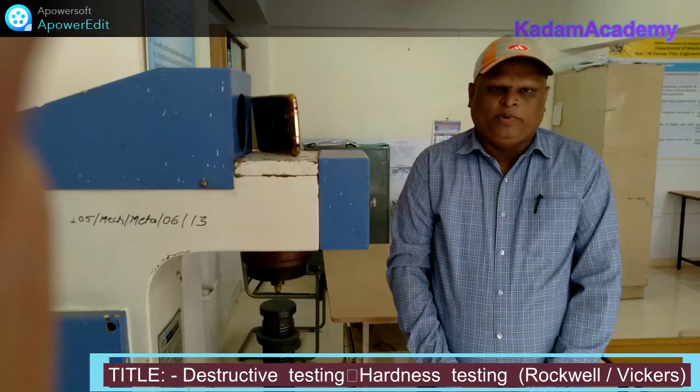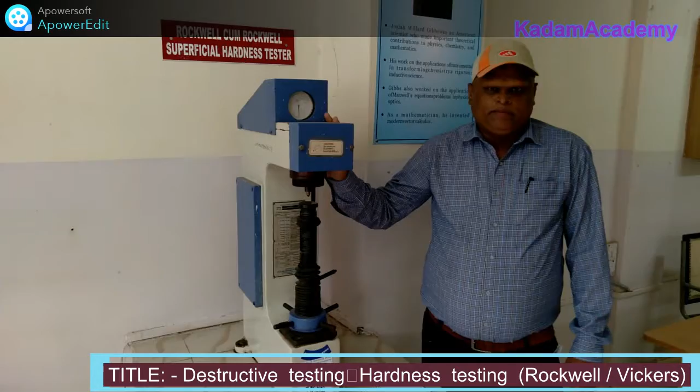Today's practical is Rockwell hardness testing. The aim of this test is to check the Rockwell hardness number of the specimens. We have taken three specimens here: an aluminum specimen, a brass specimen, and a mild steel specimen.

Let us see the principle and working of this Rockwell hardness testing. As we know from studying the Brinell hardness test and Vickers hardness test, the Brinell and Vickers tests work on the principle of area of indentation, but this Rockwell hardness test works on the principle of depth of indentation.

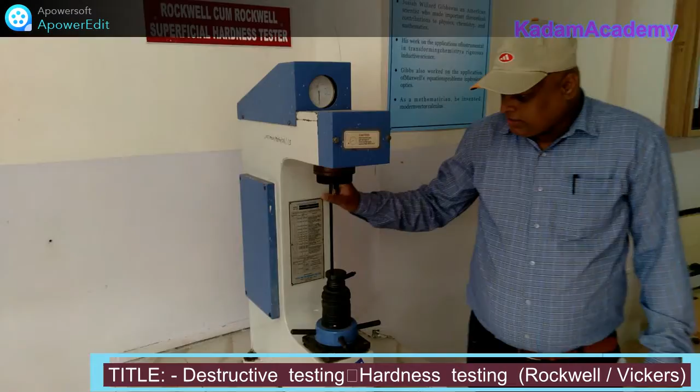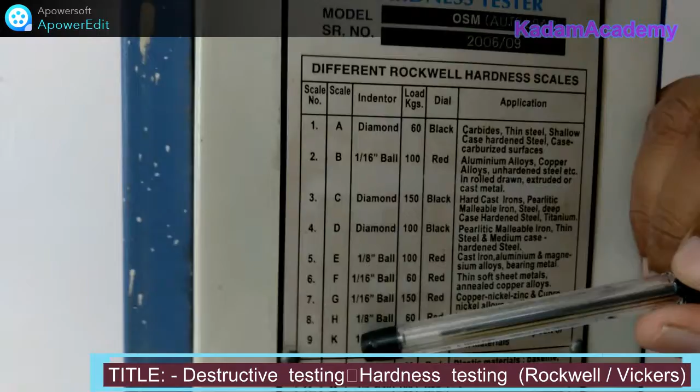Now let us see the working of this Rockwell hardness testing machine. This machine has a chart here. You can observe the chart: this is the scale number, then the scale column A, B, C, D, E, F, G, H, K, then which indenter to be used, then the load to be applied, which dial you are going to see, and the applications.

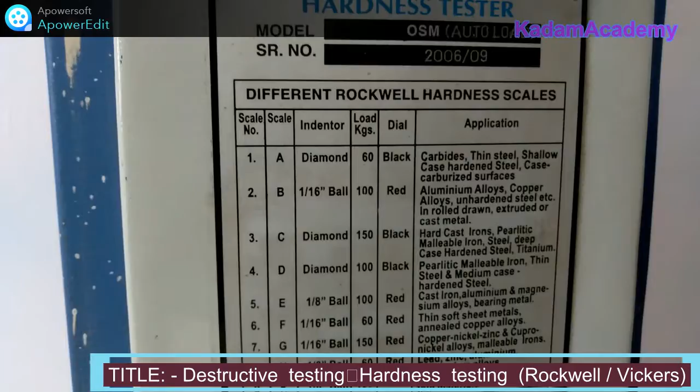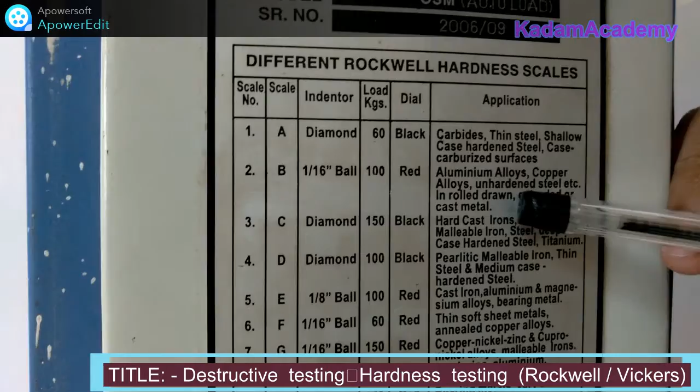In our case, as we have taken aluminium, brass, and mild steel, this comes under the second row: aluminium alloys, copper alloys, unhardened steel, etc., in rolled, drawn, extruded or cast metal. So our specimens come under this second row applications.

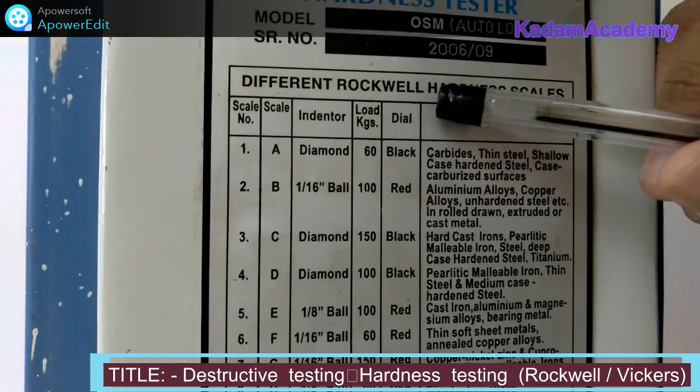So we are going to use this red dial. We are going to apply a load of 100 kg. The indenter to be used is a 1/16 inch ball indenter, and then we are going to see the scale B.

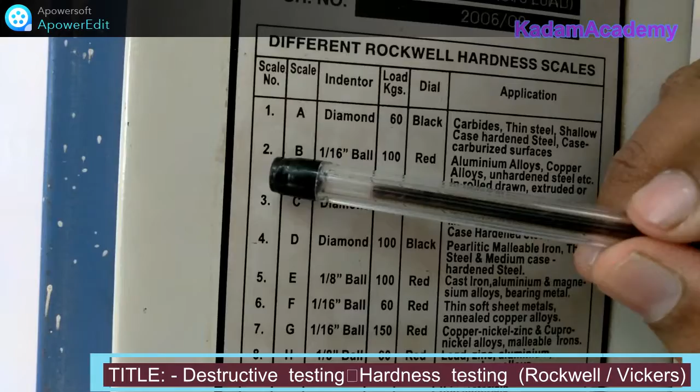So here we are using the 1/16 inch ball indenter. The diameter of this ball indenter is 1/16 inch. Then for this application, the load application is 100 kg.

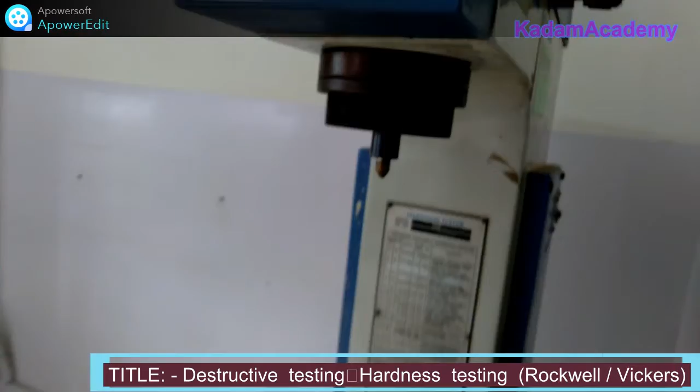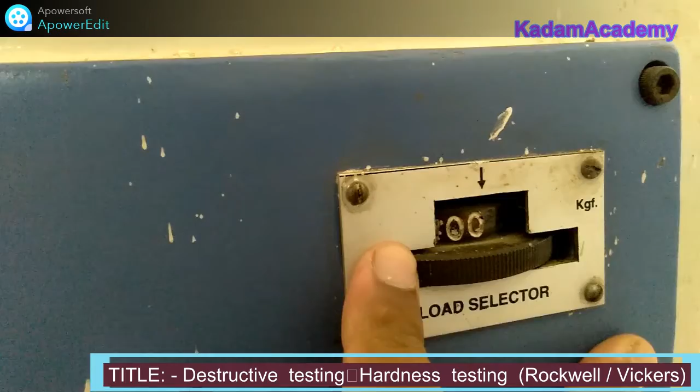So we are applying the load here using this load selector. Using this load selector, we are applying the load of 100 kg. So now 100 kg load is applied, and then we need to see the scale B on this dial.

There are three scales: one is the outside A scale, then the middle C scale, and in red there is the B scale. You can observe here the B scale as B30, 40, 50, B60, B70, B80, B90, B0, B10 and B20. This red scale is the B scale, and we are going to see the reading on this scale B.

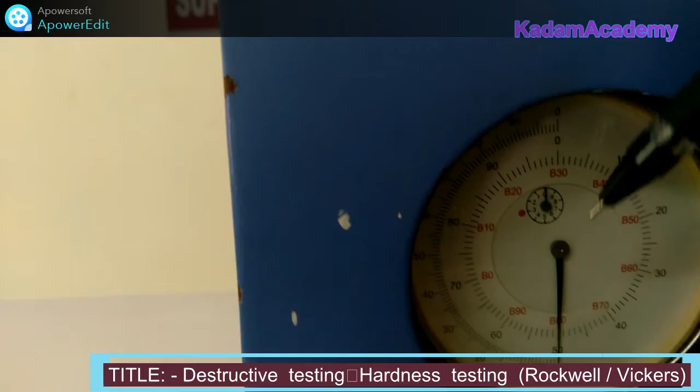Now let us take the mild steel specimen and check its Rockwell hardness number. Put this specimen onto the anvil. This is the anvil. Rotate this anvil so that we can touch the specimen to the ball indenter. The specimen is now touched to the ball indenter.

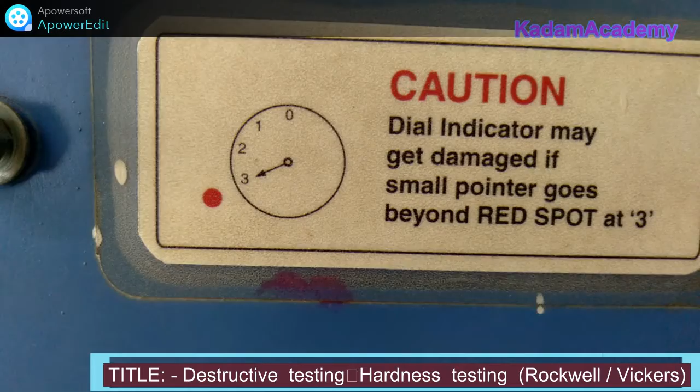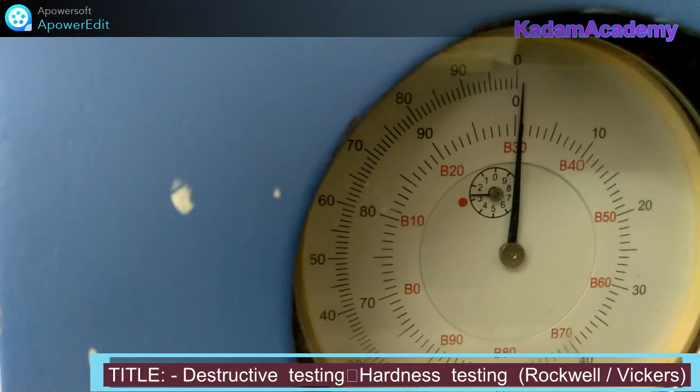Rotate this anvil such that the inner small pointer should not go beyond point 3, and let it be at 0 for the bigger pointer. The caution here is that the dial indicator may get damaged if the small pointer goes beyond the red spot at 3. Here you can observe in the inside small dial that the small pointer does not go beyond point 3. So here the minor load of 10 kg is applied to avoid the inertia effect.

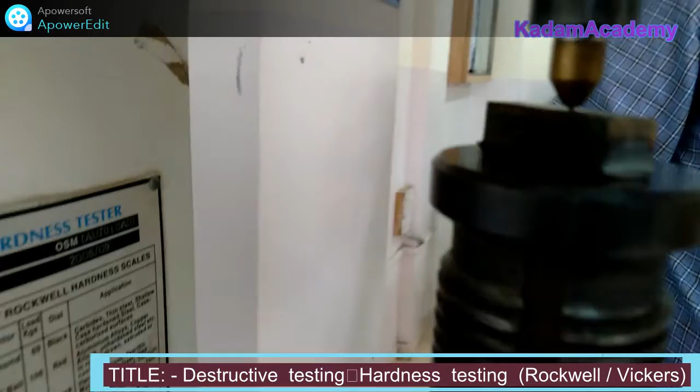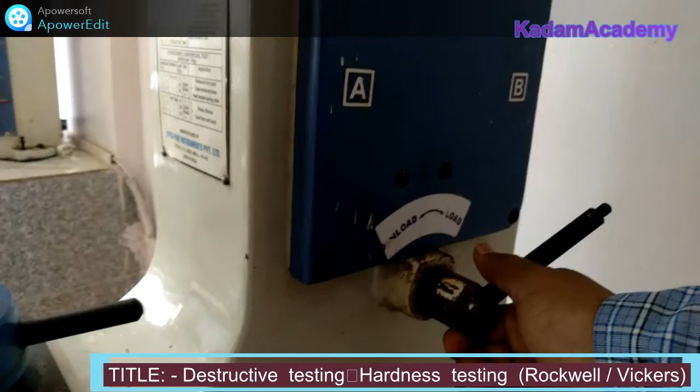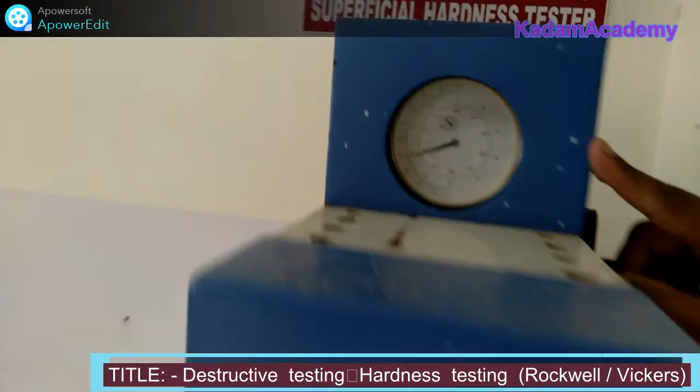Now let us apply the major load. By pulling this lever to the right side, you will apply the major load. So a major load of 100 kg is applied here. At the same time, you will observe that the pointer is moving to some numbers, but this is not the Rockwell hardness number. For that, you need to wait for 10 seconds, and then you have to unload this loading.

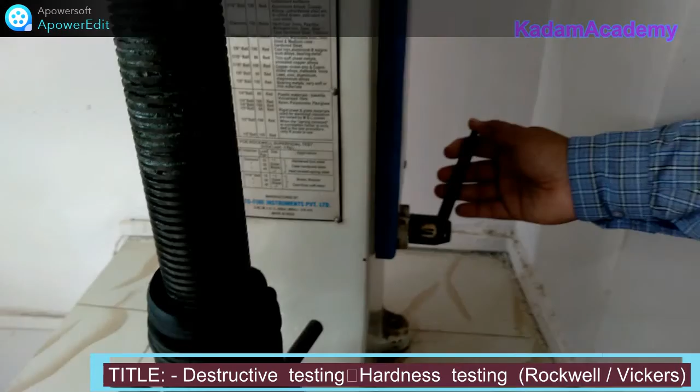After unloading, you will observe that the pointer will move to the value, and you need to read it on the B scale. So it shows B60, and in next succession, B61. So its hardness number is 61 HRC.

Now let us take another reading on the same specimen. Observe the movement of the pointer in the dial. First see that the small pointer does not go beyond point number 3 and the bigger pointer is at 0. Then we apply the load of 100 kg. The pointer is moving, so wait for it to stop. When it stops, unload it, and after unloading it will give you the reading. Here the reading is 5 HRC.

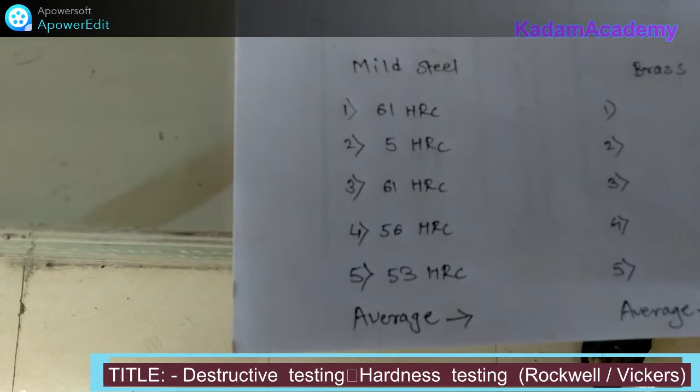Similarly, for this mild steel specimen, we will take the next 3 readings. After taking those, the readings are 61 HRC, 56 HRC and 53 HRC. So here one reading is of 5 HRC.

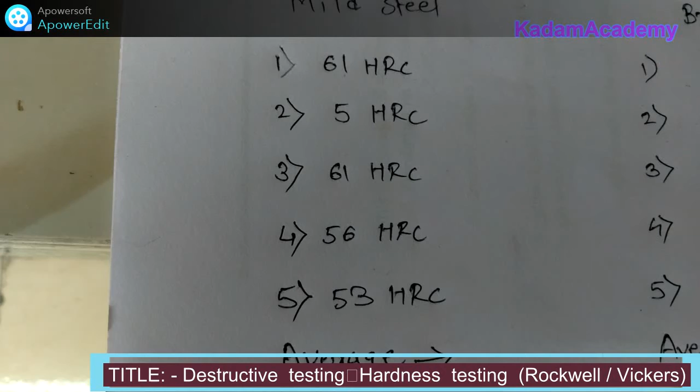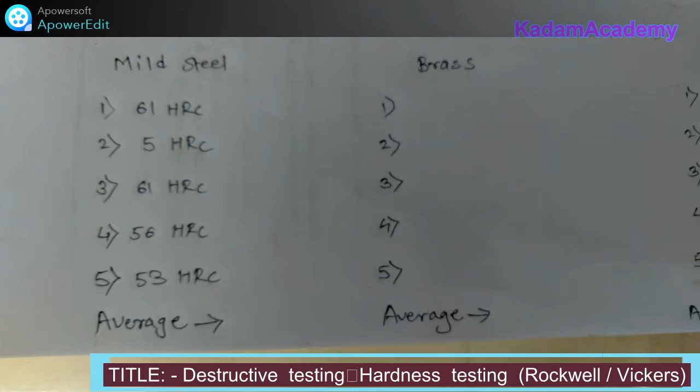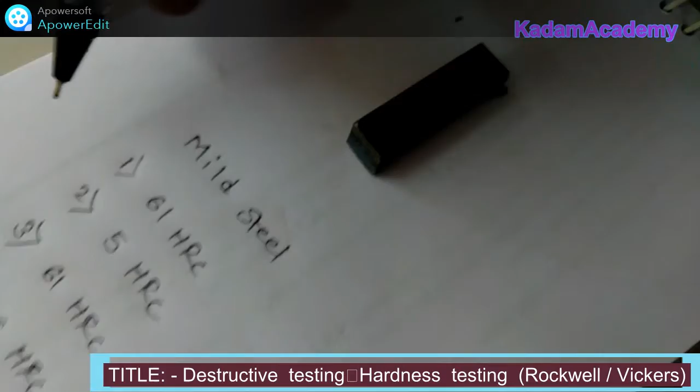As you know, this is mild steel, a plain carbon steel or low carbon steel. Since the carbon percentage is less in this mild steel, the iron carbide distribution is also less. Where iron carbide is present, if indentation takes place onto that iron carbide, you can observe the indentations here. If the indentation is on the iron carbides, you will obviously observe a higher HRC value.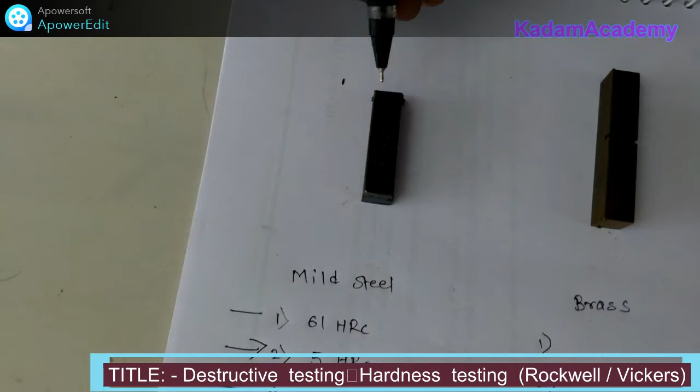This reading of 5 HRC is observed because there may not be a presence of the iron carbide phase there. So by these 5 readings you can take the average, and that will be your Rockwell hardness number for the mild steel.

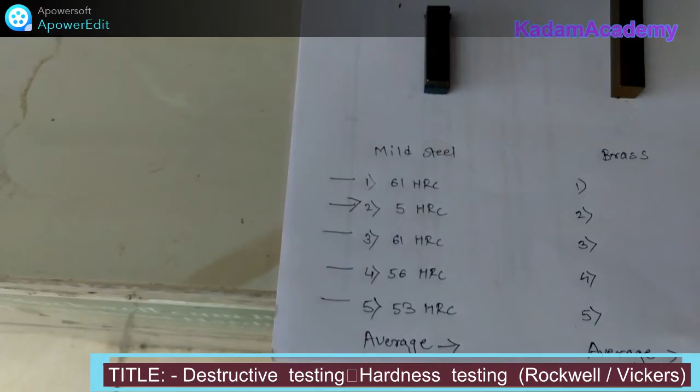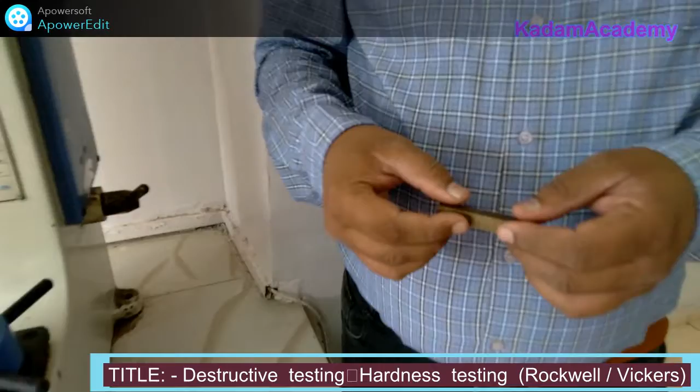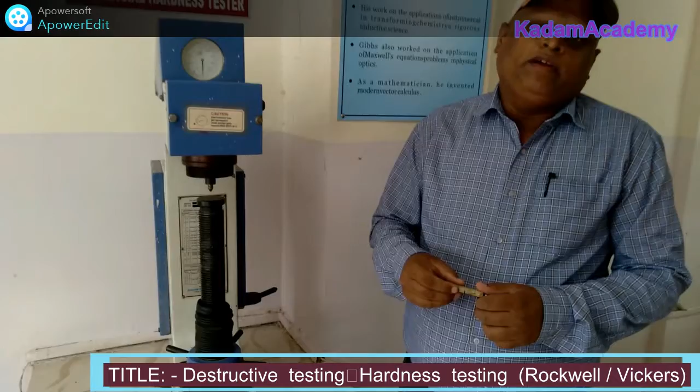Now take this specimen. This brass is an alloy of copper and zinc. According to the percentage of zinc, it has different properties. If the zinc percentage is less than 38%, it shows ductility, but if it is more than 38%, it is gamma brass and shows hardness. We don't know the exact amount of zinc present here, so we'll check its Rockwell hardness number.

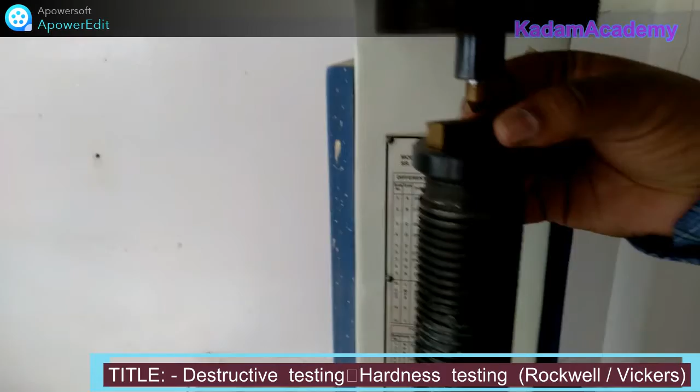Putting the specimen onto the anvil, then rotating the anvil, we apply the minor load. See the dial now - we apply the minor load such that the small pointer does not go beyond point number 3 and the big pointer is at 0. Then we apply the load of 100 kg. After application of load, the pointer moves, so we need to wait till it stops. Now the pointer stops, so we will unload, and then take the reading on the red scale, that is the B scale - the reading is 64 HRC.

Now similarly take the other readings. When the pointer stops, we need to unload. So now unloading is done, and the reading is 72 HRC. Loading, unloading, and the reading is 64 HRC.

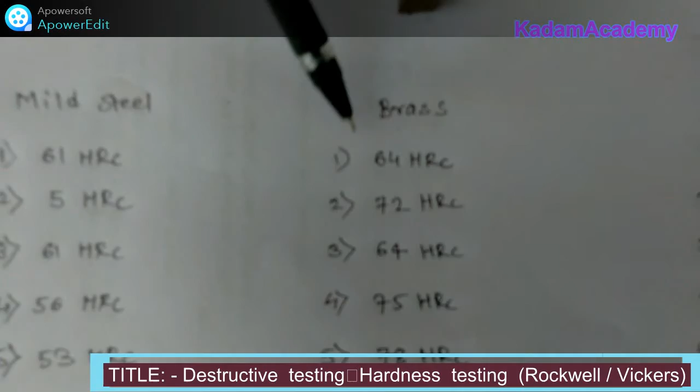Loading, when the pointer stops you will unload, so unloading of the 100 kg load, and then the final reading is about 78 HRC. Now we have taken these readings: 64 HRC, 72 HRC, 64 HRC, 75 HRC and 78 HRC for this brass material. You can take the average reading for the Rockwell hardness number.

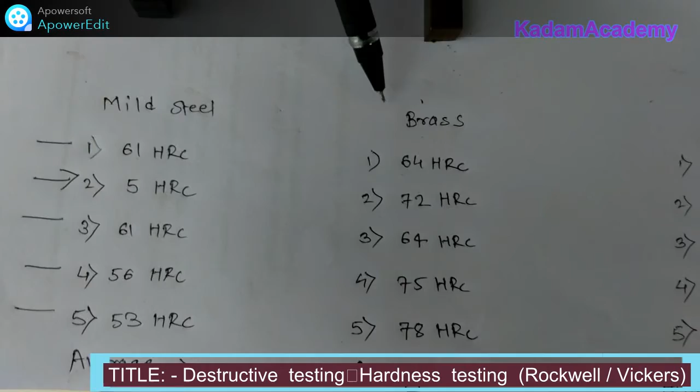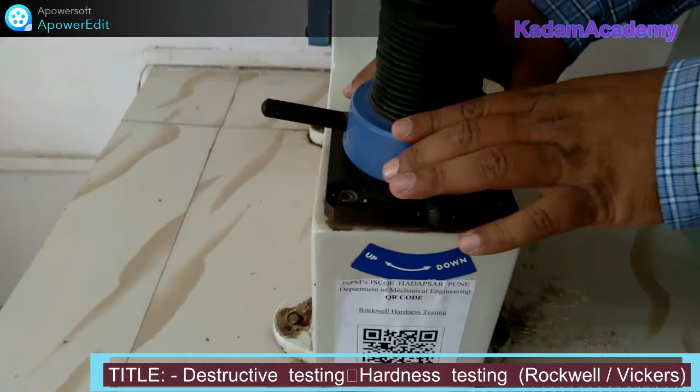Now let us take the third specimen, this aluminum specimen. Putting this aluminum specimen again on the anvil, then rotating the anvil so that it touches the ball indenter. Then apply the minor load so that the small pointer does not go beyond point 3. Then apply the load of 100 kg.

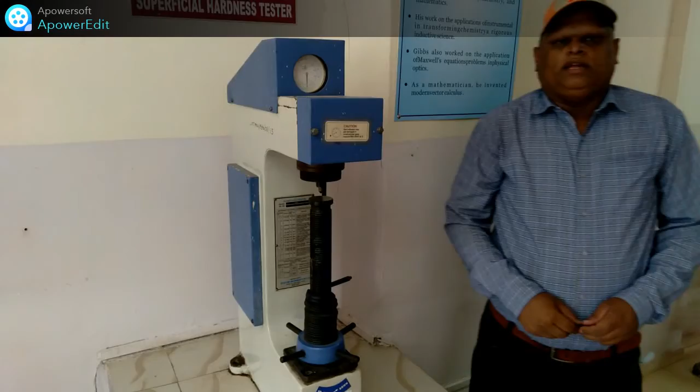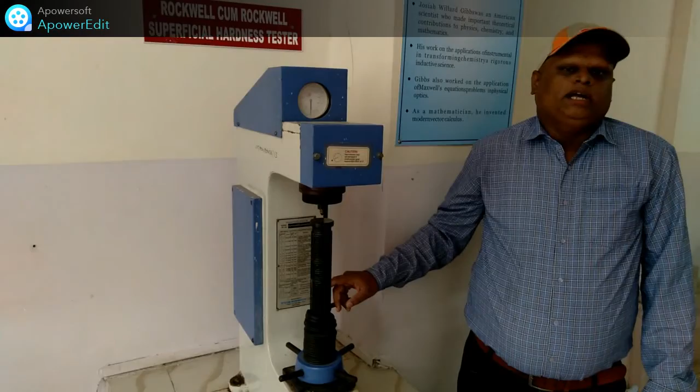Also, it involves no calculations as required in the Brinell and Vickers hardness tests. Also, it does not require any skilled operator.